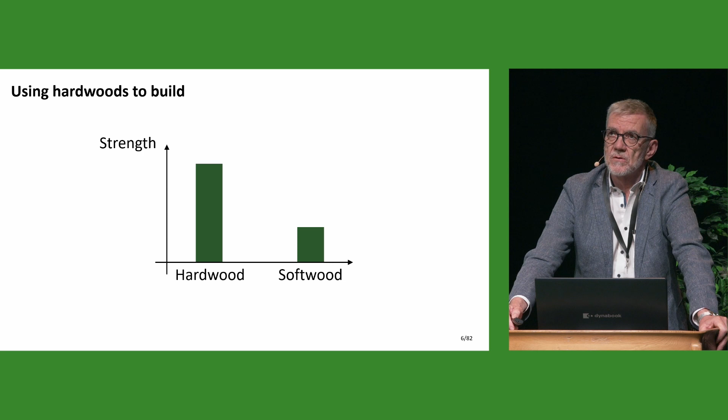Structural building materials which are available already today, made from hardwood, are glulam members, for example, beech glulam or birch glulam. Even CLT is available in hardwood today from birch, and also beech LVL, which is a product that is quite new.

It's not very old yet, maybe 10, 15 years, but it's increasingly used in highly loaded structures. So the material is there. Why don't we use it much more than we do today?

Because for a timber structure, it's not just the material you need, it's also the connections, obviously. You need, for example, to connect structural members. You need to connect a hardwood member to a hardwood member, or a hardwood member to a softwood member, or to a steel or a concrete member.

Of course, there are already rules which allow you to design these or some of the connections, but these rules are, let's say, or lead to quite conservative results with hardwood connections.

If you look at the structure, at the capacity, structural capacity of a member compared to the structural capacity of a connection, this is unbalanced today. The member has a very high strength, the connection has a low strength.

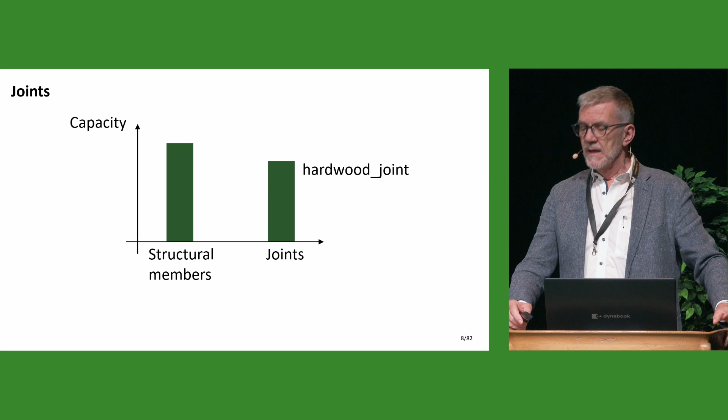And thereby improve the economy and efficiency of timber structures using hardwood.

Mika already has told you the primary purpose of this project: high-performance hardwood structures with connections which are also high-performance connections.

And of course, we need design rules. We need to transfer this knowledge into practice so the engineers are able to use these high capacities.

The industry partners had a bit of a different view, or a complementary view, you could say. They were asking, how can we set the fasteners, for example?

Have you ever tried to, let's say, drive a nail into a beech member? With high probability, the nail will buckle. It's much, much more complicated than to drive a nail into a spruce member, for example.

And can the existing fasteners be used? The nail, for example, is there a need to develop new types of nails which you can use in hardwood structures?

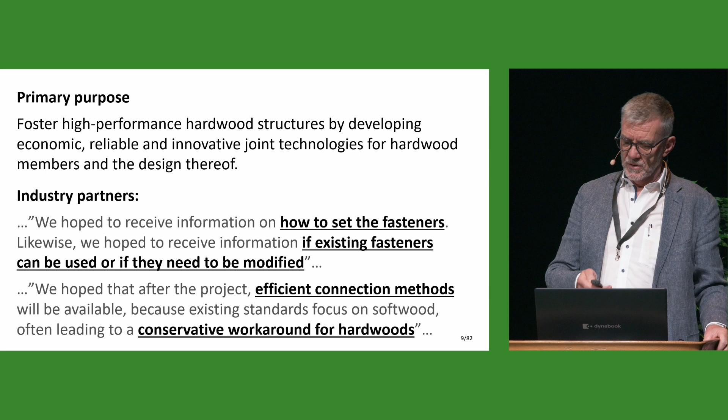They hope for efficient connection methods and hope to get rid of some of the conservatism related to hardwood connections today. Now, how do we go about reaching these goals?

First, we need to understand hardwood connections because they behave differently in some aspects than softwood connections. Then we need to complete existing knowledge where there are knowledge gaps. And then, where possible, we need to optimize or improve the connections so their load carrying capacity and stiffness also increase. These three tasks, understanding, completing, and optimizing, were taken over by different research partners, and implementation was taken over by all.

Understanding and implementing was taken over by Linnaeus University in Växjö, Sweden, and Karlsruhe Institute of Technology. Here we looked at really understanding the difference between hardwood and softwood connections. Are there differences? Which differences are there, and how can we explain the behavior? Then filling knowledge gaps, completing information, especially for axially loaded screws.

That was performed by Technical University of Graz. And optimization was done by LERMAB in Épinal. They especially looked at the rope effect, at increased friction between the members to be connected, in order to increase connection capacity.

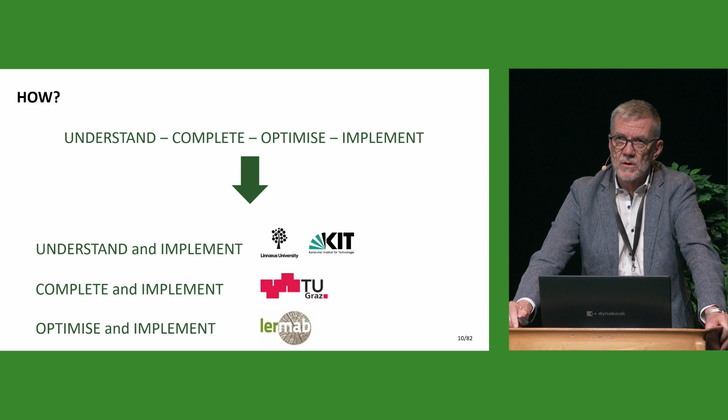Now we'll start with understanding, and I will give the floor to Elisabeth Cook from Karlsruhe Institute of Technology. Elisabeth, the floor is yours.

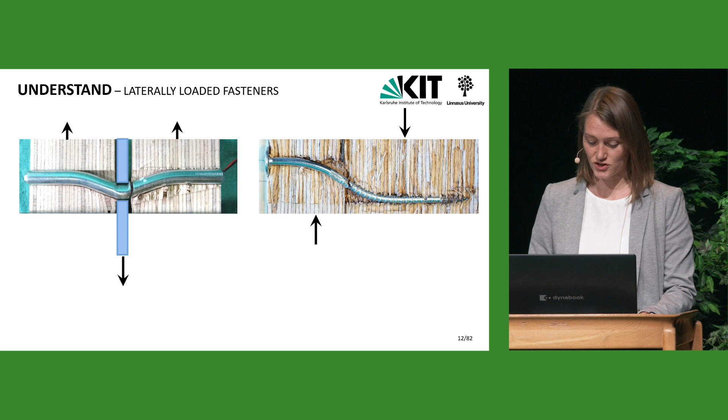First, there is the embedment of the timber. In the area of the inclined fastener, the embedment strength is reached. Second, we can observe the bending of the fastener, which leads to the formation of plastic hinges. This, of course, depends on the timber thickness.

Due to the inclination and the friction between the fastener and the borehole, the so-called rope effect develops and leads to a normal force in the fastener. The rope effect increases the load carrying capacity and is one of the most important load mechanisms for laterally loaded fasteners.

So looking at these two shown connections, we can observe a failure of the fasteners in the shear plane, respectively in the area of the plastic hinges for the timber-to-steel connection. This is a new failure mode that can occur in hardwood connections, and it leads to one of our main aims of research.

The current design codes are mainly based on connections made of softwood. Considering the two shown connections, which are geometrically identical, we can observe differences concerning the deformation of the fasteners. Accordingly, we need a validation for the European yield model for hardwoods. In addition, we wanted to find explanations for the new failure modes, and of course we need to formulate proper execution rules like fastener spacing.

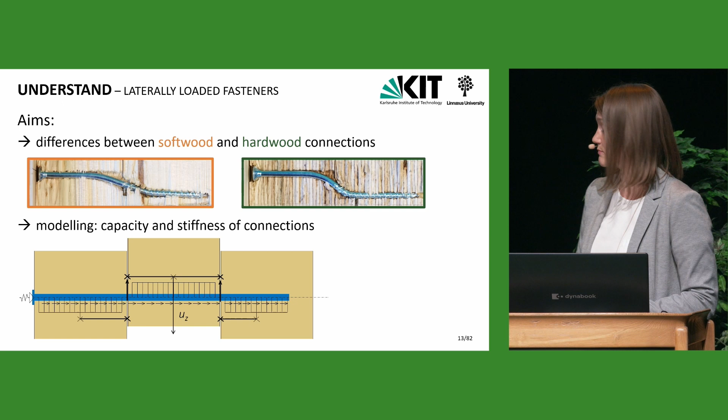During our project duration, we have conducted research on many different dowel-type fasteners, such as screws, dowels, staples, or nails. The timber members in our test setups were made of beech, birch, or oak, and in addition we carried out many tests with spruce specimens to point out the differences between softwood and hardwood.

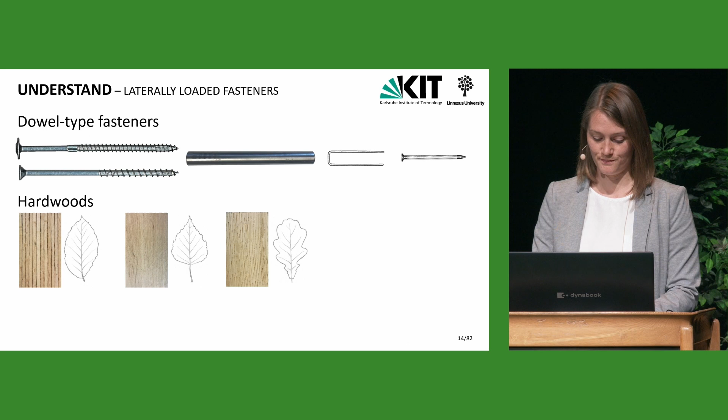To understand the different contributions to the load carrying capacity, we need several input parameters for our connection. A main aspect was the determination of material properties, such as the yield moment and the tensile strength of the fastener. Therefore, 4-point bending tests or tensile tests were carried out.

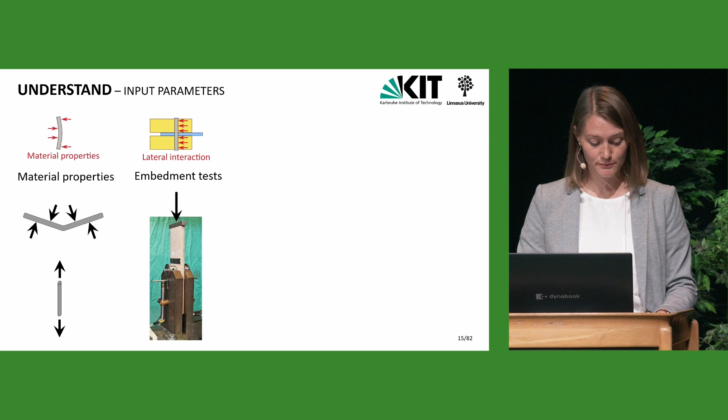To get knowledge about the occurring normal forces in the fastener during lateral loading, strain gauges were applied, glued into the dowel. Thus, the normal force could be measured.

The last contribution to the load carrying capacity is activated by the axial interaction between fastener and borehole. For fasteners with a smooth surface, it is characterized by friction, and for profiled fasteners, such as screws or threaded parts of screws, the withdrawal capacity can be taken into account.

In order to investigate the two contributions from friction and embedment, which occur simultaneously in a connection in reality, biaxial tests were also carried out with the activation of the two load directions. Some of these results will be presented now from my colleague Romain.

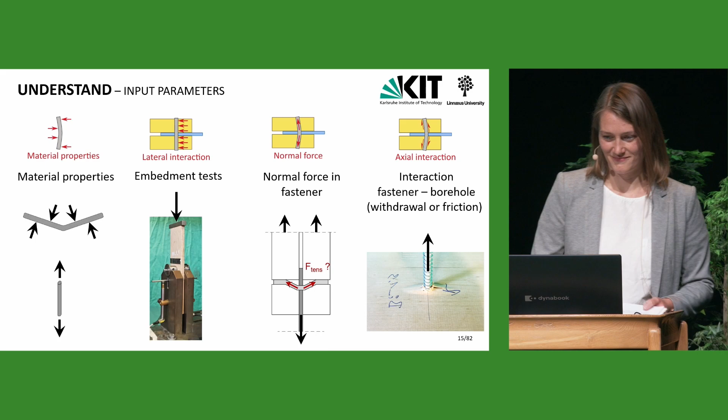The aim of the experimental campaign that I'm going to present now was to investigate the combination between lateral embedment and axial force.

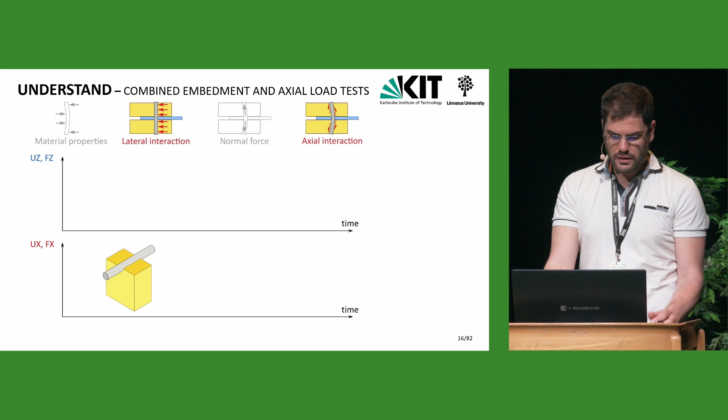The tests were based on, as you can see here on the picture, half-hole specimens. For all series, vertical loading by means of loading and unloading cycles was applied first up to a defined lateral embedment displacement or a defined lateral embedment pressure. Then a horizontal loading was applied, while the lateral embedment displacement was kept constant.

This experimental campaign included two types of steel fasteners, 8mm hardwood screws and a 12mm steel dowel. The mechanical response of combined axial and lateral loading of steel fasteners into various wood species were investigated with beech LVL, oak, birch, and spruce, so that a large range of density from 400 to 800 kilogram per cubic meter was investigated and tested.

I'm going to present now some experimental results for the 12mm steel dowel. Here comes the result: coefficient of friction versus the lateral embedment displacement.

For a lateral embedment displacement of around 14mm, the coefficient of friction observed was around 0.8, and this value was observed for each wood species. Just for some birch specimens, very early cracks were observed, which could decrease the pressure surrounding the dowel and thus the coefficient of friction.

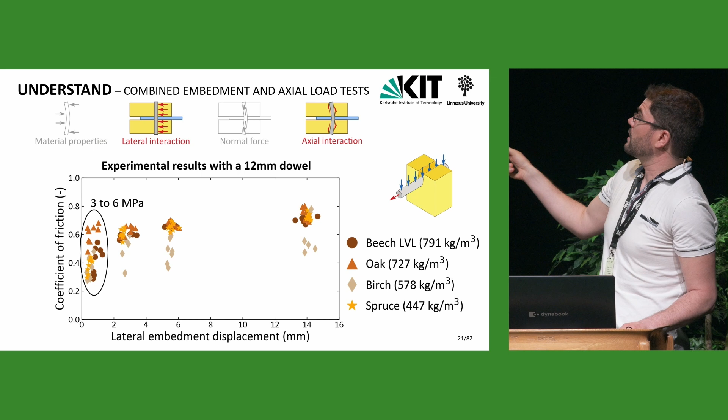In conclusion of this test, it shows a nonlinear relationship between the coefficient of friction and the lateral embedment displacement. It's not uniform, it's a nonlinear relationship. That is an input we can use in the modeling, and we will discuss that later.

I will now give back the floor to my colleagues.

All of the previously presented parameters are crucial for the understanding of the rope effect. The following explanation of the rope effect is based on the work of my colleague Michael Schweigler, and I would like to show it to you.

We have three different effects. The first one is the normal force in the fastener. This contributes to the shear resistance of a connection if a part of the fastener is inclined, which is the case for failure modes with plastic hinges.

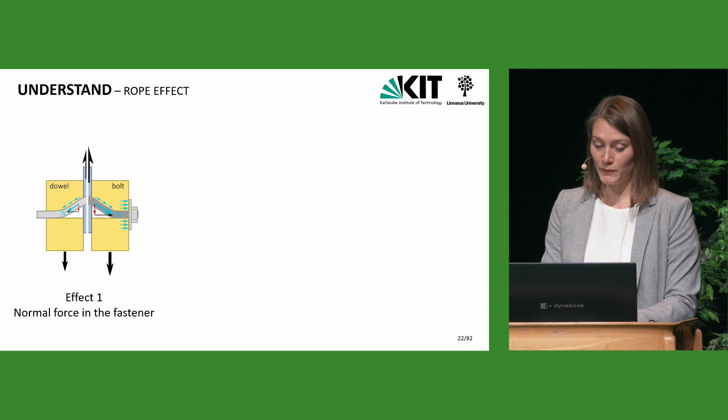The normal force in the fastener might be caused by interaction between the fastener and the borehole, for example friction, or by a mechanical resistance against withdrawal, like the thread of a screw or the washer of a bolt, as shown here in the connection on the right-hand side.

The second effect is the friction in the shear plane. The described normal force also causes a compression component perpendicular to the shear plane. This compressive force leads to a frictional force parallel to the shear plane, which increases the shear resistance of the connection. This is the rope effect as it is considered in the current design code, Eurocode 5, with a friction coefficient of 0.25.

The third effect is the straightening of the fastener, so additional embedment forces and additional connection resistance can be activated, in some cases, with failure modes exhibiting multiple plastic hinges.

In a bolted connection, the washer acts as an anchor, which induces normal force in the bolt. The normal force causes a straightening of the fastener, and this generates additional embedment resistance in the area of the plastic hinge.

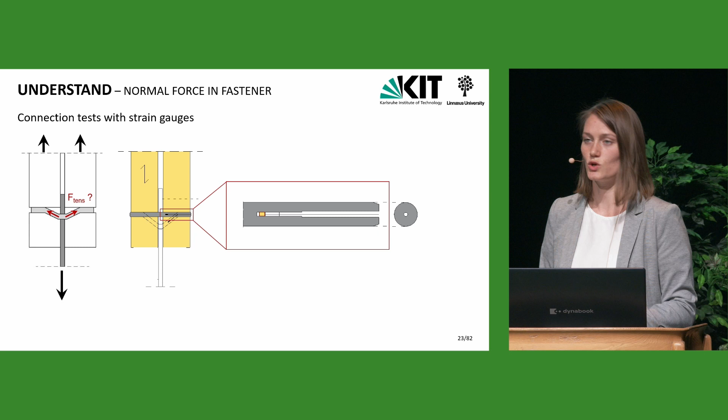We carried out 5 tests, and the strain gauge in the dowel is located in the tension zone, between the 2 plastic hinges that form during loading. You can see the borehole and the position of the strain gauge, and in addition, an opened dowel.

To illustrate our results, I'd like to show some load displacement curves on this slide. In the diagram, the top lines mark the machine load per shear plane, and the lower dashed lines mark the measured normal force in the dowel during the lateral loading.

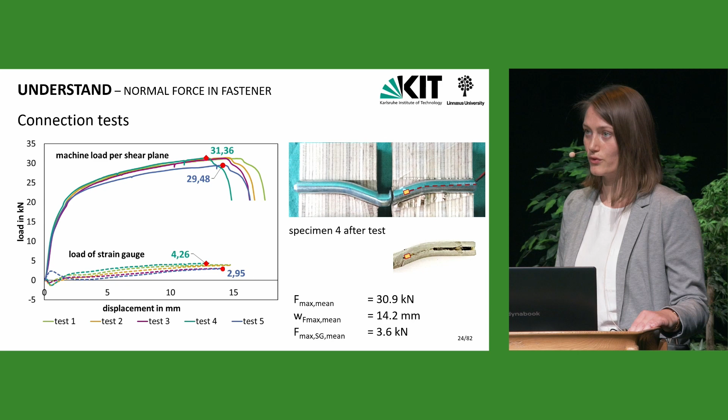As you can see, we reached a maximum load of about 31 kilonewton in the shear plane, and until the point of maximum load, we could record a normal force in the fastener of about 3 to 4.3 kilonewton, which amounts to up to 10% of the load per shear plane.

The connections reached about 14 millimeters of displacement before failure was initiated. All dowels during these tests failed due to fastener failure in the shear plane, as you can see in the picture. With these results, it can be shown that also in doweled connections, an elementary contribution to the load carrying capacity can be activated by the rope effect.

So the modeling of the rope effect is a challenge, and knowledge of the occurring normal forces in dowels is necessary for a validation. Following this, an insight into the modeling will be given by Romain.

Elizabeth explained a bit about the modeling, but I will explain and give more details now. We have different inputs: different material properties from the steel fasteners, the lateral interaction — roughly called the embedment — normal force in the fasteners, and the axial interaction, which can be the friction for the dowel or the withdrawal interaction for screws.

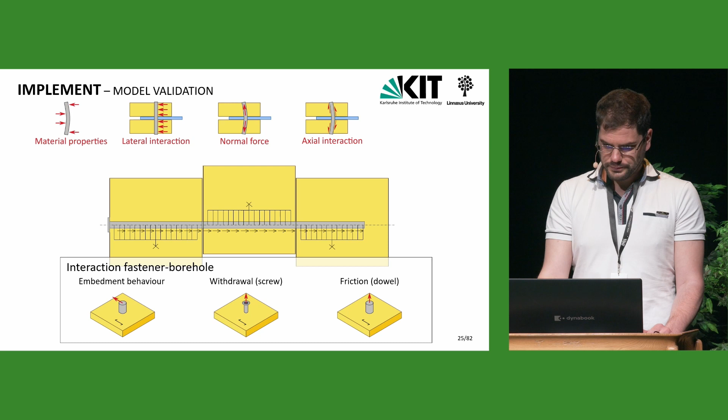The steel fastener is modeled as a simple beam element with an elastoplastic model, and you can obtain these properties thanks to bending tests or tension tests. The last effect of the rope effect is the friction between shear planes, which can also be included in the modeling.

So if we go back now to the experimental result shown by Elizabeth: on the y-axis you have the shear force of the fastener with the full black line, and the gray dashed line is the normal force in the fastener measured by the strain gauge. Now we can make 3 different hypotheses.

One hypothesis: you have no friction along the fastener, so no interaction between the fastener and the bore hole. If we run the simulation, we have quite a good response in the elastic part of the curve, but the plastic capacity measured by the beam on foundation model is much lower than the one measured during the test.

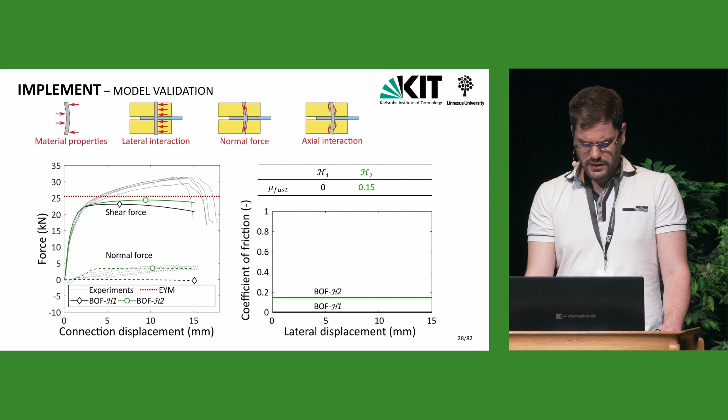So now if we make another hypothesis, with a uniform friction along the fastener and no relation between the coefficient of friction and the lateral displacement, we can see the rope effect starts to be activated. We can increase the plastic capacity of the connection, and we can have some normal force.

Now if we use the third hypothesis, with the experimental result shown before — a nonlinear relationship between the coefficient of friction and the lateral displacement — we find a very nice response between the beam on foundation modeling and the experimental result for the shear force. We still observe a higher normal force inside the fasteners, so we need to investigate that further.

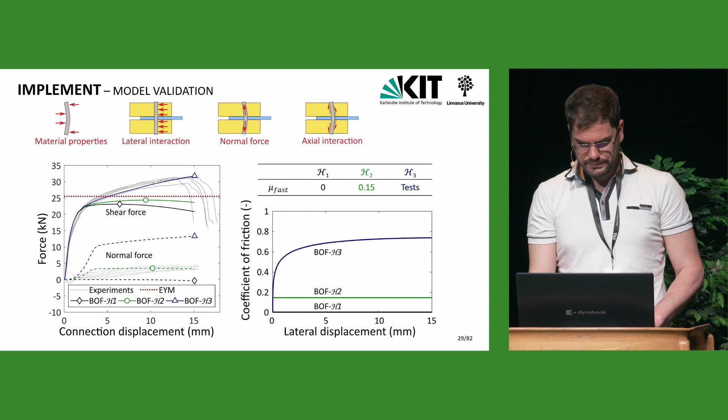Now I would like to present another application of the beam on foundation modeling, which is a proposal of a design equation to estimate connection axial stiffness of connections.

But the first question is, why do we need that? Why do we need a new design equation to estimate joint stiffness? It's clear now timber structures are becoming bigger, taller, and more complex, as we saw this morning, and this is also a problem for connections.

For SLS design, joint stiffness in the connection area is really important for vibration analysis, especially for tall timber buildings. And for ULS design, it's important as well to understand and estimate the good load distribution for each timber member in the connections.

And to estimate the brittle failure mode. For example, if you assume the same identical stiffness in each shear plane, you will not have the same load distribution if you don't have the same stiffness in each shear plane. So we need to go further for that.

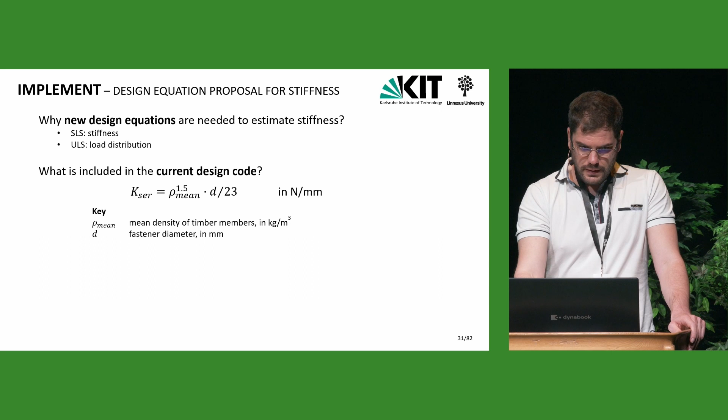The question is also, there is no difference in this equation whether you have a connection with a slotted-in steel plate or a connection with an outer steel plate. It's the same for both types of connections. We can also ask whether there are other parameters which should be included in this equation, for example the thickness of the timber members, the thickness of the steel plate, and so on.

So to answer this question, the first step is to run numerical simulations with the beam on foundation model. For that, different parameters were used for the simulation.

Different densities of the timber member, different numbers of fasteners in a row, different rows of fasteners, different distances between the fasteners, different thicknesses of timber member, different thicknesses of steel plate, and different dowel diameters.

We ran simulations with slotted-in steel plate connections, and simulations with thin and thick steel plates where the steel plates are outer members. In the thin steel plate case, the ends of the dowel are free to rotate. In the connection with thick steel plate, the ends of the fastener cannot rotate.

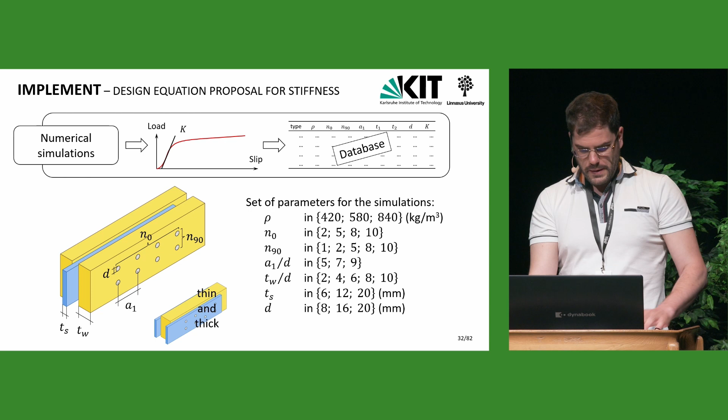The second step is to do a nonlinear regression analysis of the database to find the exponent of each parameter that is important to estimate the stiffness of connections.

With this nonlinear regression analysis, you can create three different equations for these three different connection configurations, and so estimate the stiffness for each. You can also use these equations to estimate the stiffness of multiple shear plane connections.

The last step is to validate these design equation proposals. For that, an experimental database was used, including different wood species, products, dowel diameters, numbers of fasteners, and two or multiple shear plane connections.

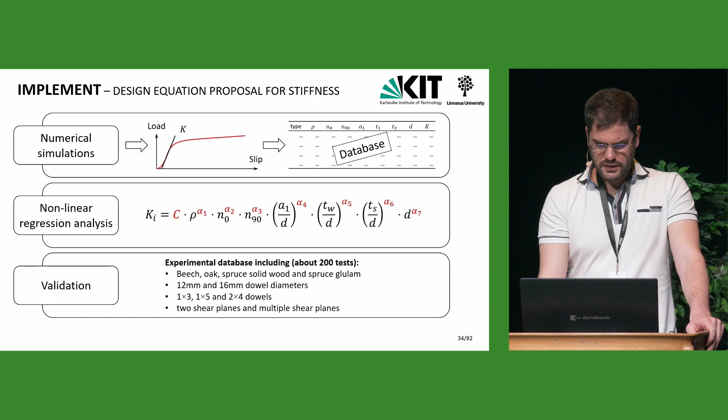That is my conclusion for this part of our work with KIT and Linnaeus University. To summarize: first, we checked if the current design equations in the European code are suitable for hardwood connections. In general, yes, so we can use this equation and improve the code with new failure modes.

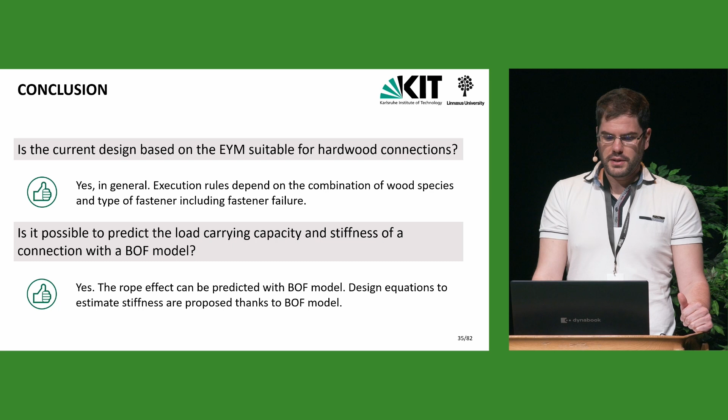We can also use the beam on foundation modeling to predict the load-carrying capacity and the stiffness of connections, and the rope effect can be predicted as well with the model.

So we have now looked at joints with laterally loaded fasteners, and I will let the floor to my Austrian colleagues to present joints with axially loaded screws. Thank you, Romain.

I begin with the characteristics of a screw joint in timber. There is a timber bar element with a grain and main bearing direction. Of course, for a screw we need some outer connection elements. The fastener we concentrate on is the screw, or more precisely, groups of screws. The screws you see here are inserted at an angle to the grain.

Further, there is the loading direction, and the screws have a really high bearing capacity in the axial direction.

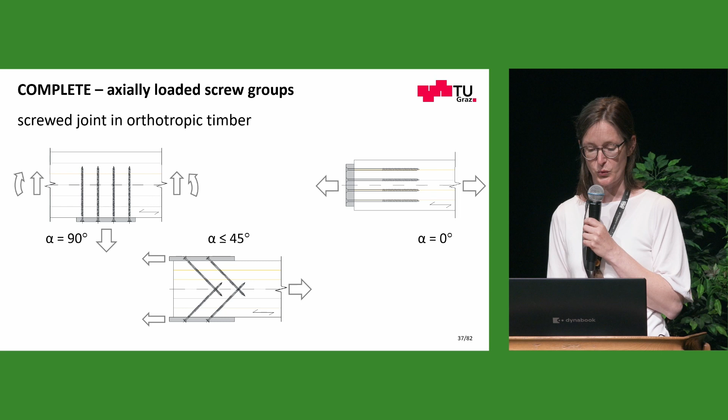There is a variety of joint design, parameter settings, and loading situations, and now the challenge is to define logical, general, and simple design rules for all of them. Such design rules concern geometric minimum conditions and execution rules, for example, some in-between spacings, minimum distances, and so on.

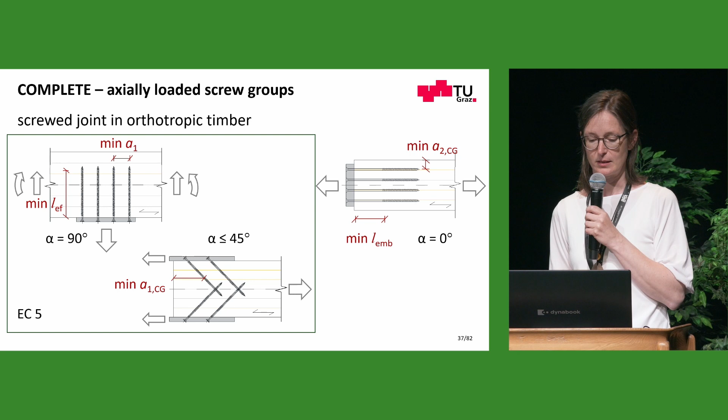The actual valid design standard Eurocode 5 regulates these connection types. Additionally, we have several screw approvals, and partially they also allow end grain joints. The strategy for a safe joint design in Eurocode 5 is, on the one hand, to define minimum geometric and

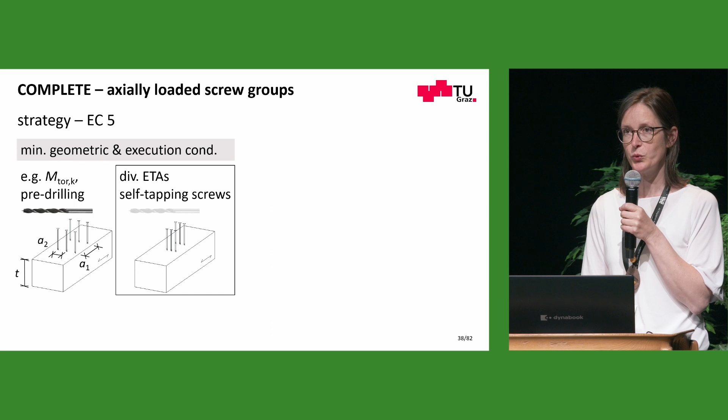execution conditions, for example, like the torsional resistance of the screws, pre-drilling, and then named spacing or distances. Diverse ETAs allow the use of self-tapping screws without the need to pre-drill, and usually they allow a tighter grouped design.

On the other hand, for the knowledge of the joint capacity, we have to consider the failure modes at the insertion and at the loading. We avoid the splitting failure or torsion failure by the insertion with these given conditions. And to get the resistance, we have to verify all possible failure modes.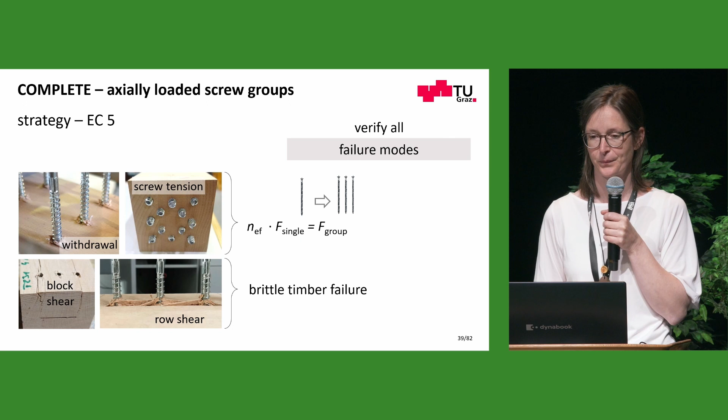This is one problem of these brittle timber failure modes, and additionally, Eurocode 5 doesn't contain any verification model for these brittle timber failure modes. Actually, they are under discussion and always with focus on softwood species.

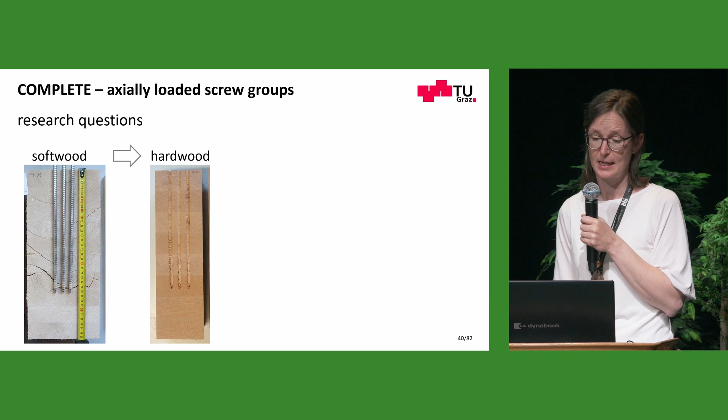All rules for screws focus on softwood species. The question is now, are the given conditions adequate for application in hardwoods?

Next question: there is the higher density of the hardwoods, followed by a higher insertion resistance and bearing capacity. Can we use the same arrangements and the same screws? Are there limits in the screw capacity?

So meanwhile, we have screws with partially optimized properties for use in hardwoods, even self-tapping screws. So the safe insertion can be easily controlled by doing so, and producers and our experience show that the insertion works.

And the third question is, due to the unsolved handling with these brittle timber failure modes, we suggest to prevent them by defining additional conditions. You see, we need to review the given regulations on hardwood and investigate their impact on the failure behavior.

We did a lot of experimental investigations within this Hardwood joint project. And from the manifold application possibilities, we concentrate on 3 different joint types.

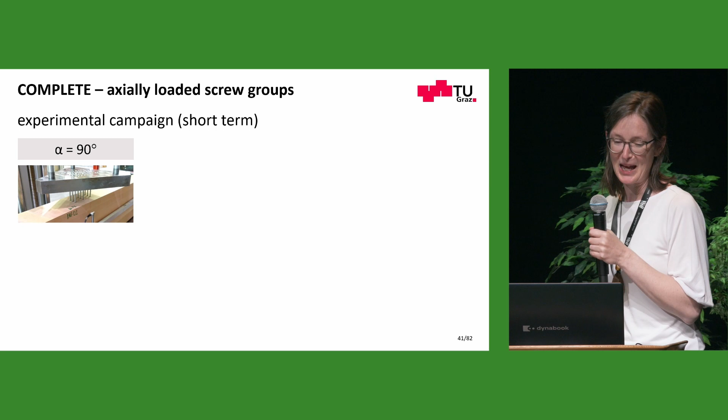A connection with loading perpendicular to grain. A tension lap joint with an inclined row of screws, and an end grain joint.

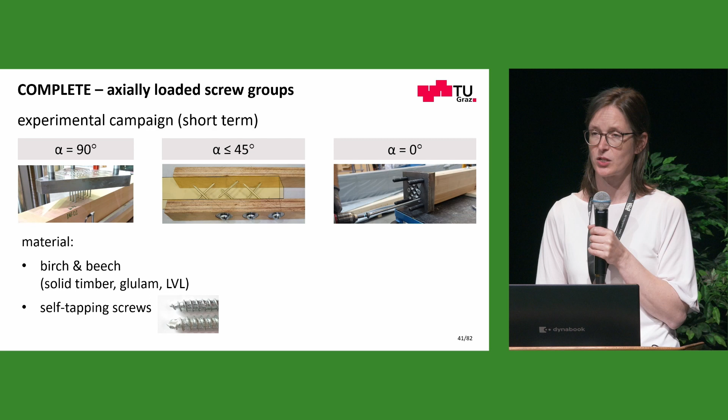As material, we concentrate on hardwood species, birch and beech, and we tested them in form of solid timber, glulam and LVL. We used self-tapping screws as worst case scenario for possible initial crack building.

We varied the parameter settings, like the spacing in between the screws, the dimension, the insertion depth, and so on, the group size. And finally, we related them to the failure modes.

And presenting now the main results, I come back to the questions. Are our screws and the minimum geometric and execution conditions adequate for our axially loaded groups of screws?

A good note, a good thing. Yes, generally they are. And the second important question: can we suggest minimum geometric and execution conditions to avoid these brittle timber failure modes?

Even here the answer is yes, but we have to differ between the joint types with a separate view on end grain joints and more or less all the others with insertion from the lateral timber side.

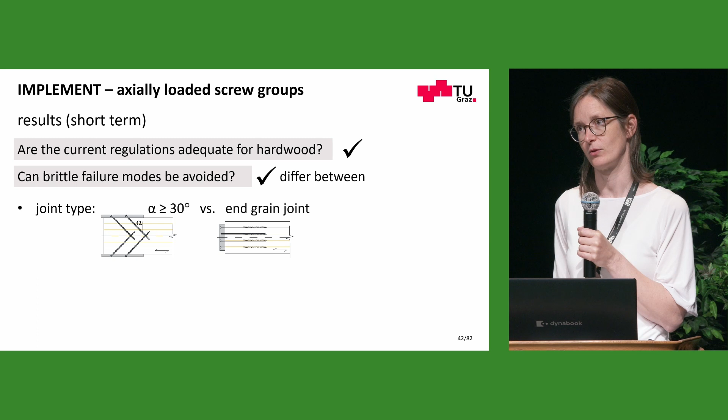We have to differ between the timber products LVL and glulam. And we have to consider there are different regulations according to Eurocode 5 and diverse ETAs.

And additionally, we define some additional parameter settings for the end grain joints. And in addition, there is some more specifying for which, if you differ between withdrawal and screw tension failure.

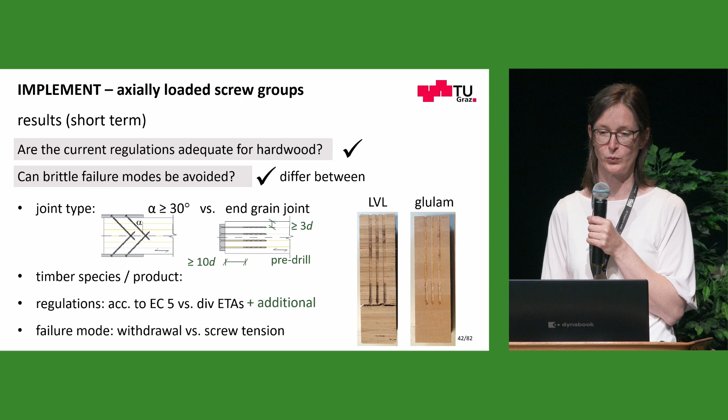So that's in the end easy, that I can say yes, that works. Screws in hardwood work, and so we learned

what's the short-term behavior of these groups of screws, and we know there are some long-term effects in the timber regarding the load intensity and the climate conditions. So what about these long-term effects, named duration of load effects? This tells us now my colleague Michael Stettner.

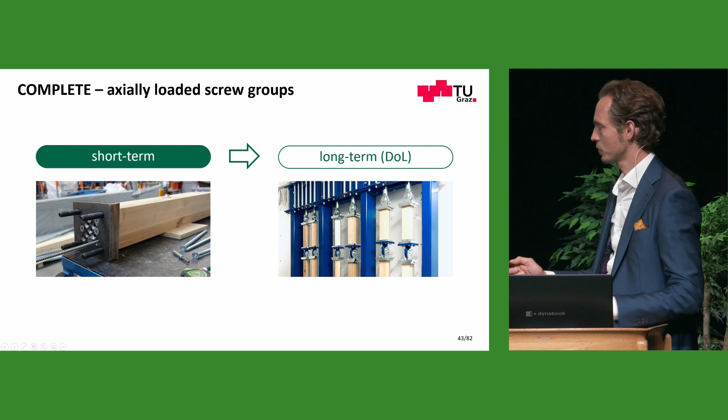My name is Michael Stettner, and I would like to make a switch now from the short-term testing to the long-term testing. As Ursula said, it's also known as the duration of load effect of self-tapping timber screws.

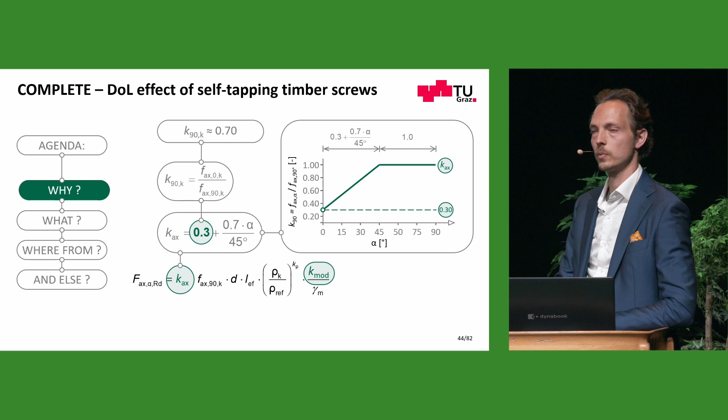As I mentioned, we have the K-mod factor, and the K-mod factor considers the product, the joint, the service class, and the load duration class.

I would like now to show you the test setups. I have two test setups. On the left side you can see the test setup for the single screw, and on the right side you can see the test setup for the groups of screws with the group size of 4 and 9. On your very left hand side you can see the different screw types which I'm using.

Furthermore, I use spruce and beech and also birch, and different screw types. I also have a variation in the angle axis to the grain with 0, 15, 30 and 45 degrees.

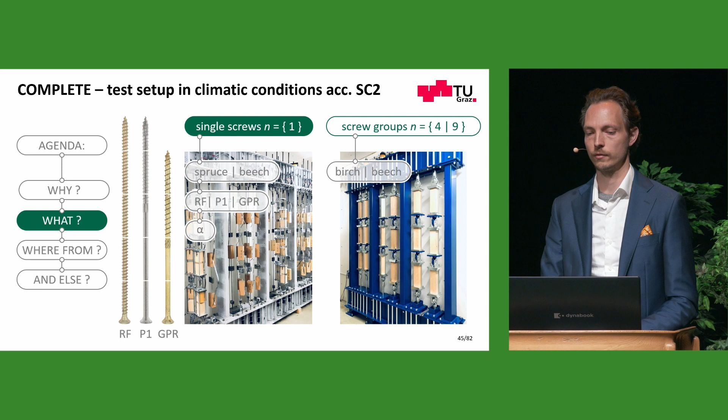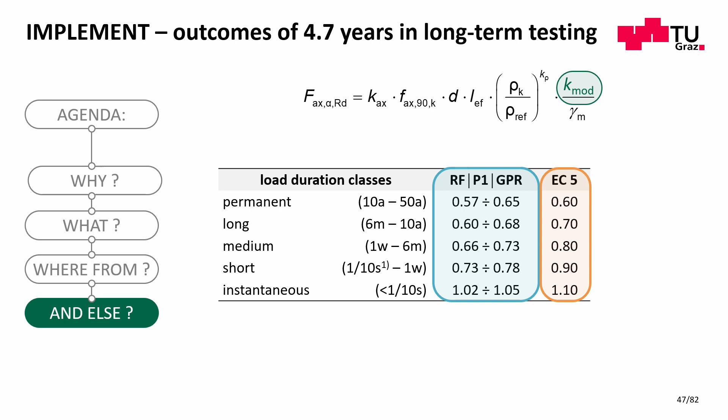In the next step I take the K-mod factors from the chart on the conservative side, and I have some values for you. If we now have a look at the next table, you can see these values for the load duration classes for the different screw types. I have also added the K-mod values from the current standard, the Eurocode 5, and we can see that there is not that big a difference due to the K-mod factors, which makes me quite happy.

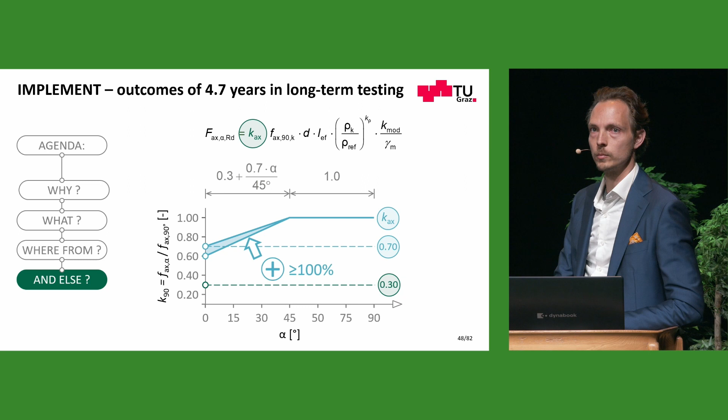Referring to the bilinear diagram again, as I said, we can see here the 0.3. Now I can make a suggestion. I have to say the angles with 0, 15, 30 and 45 degrees, and I would like to mention that I started investigations with 90 degrees just last week. Now I would like to suggest that we can increase the factor K90 from 0.3 to approximately 0.6 or 0.7, so we increase the performance by more than 100%, and this is very nice.

So at the end, I would like to repeat our question: if the geometric minimum and execution conditions are also applicable in the case of DOL, and I have to say yes, they are, because I observed in each single long-term test a withdrawal failure.

So this is very good, and I can provide K-mod factors for the single screw already. The K-mod factors for the groups of screws are now being computed, and I'm looking forward in the near future to being able to say something about the K-mod factors for the group of screws.

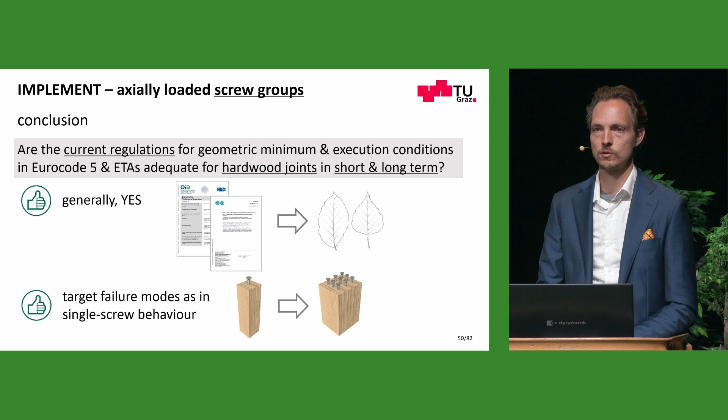So let me now make an overall conclusion according to the presentation also of Ursula. I would like to ask again: are the geometric minimum and execution conditions adequate for hardwood joints in short and long-term testing? Yes, they are. And it's good that we have the target failure modes also in the single screw behavior, so we can transfer our results to the group of screws.

So we were now talking about the dowel type fasteners, and now I would like to ask if there is some other opportunity to increase the stiffness and the capacity. I would like to invite Annabelle, which is a French colleague of mine. Annabelle, please.

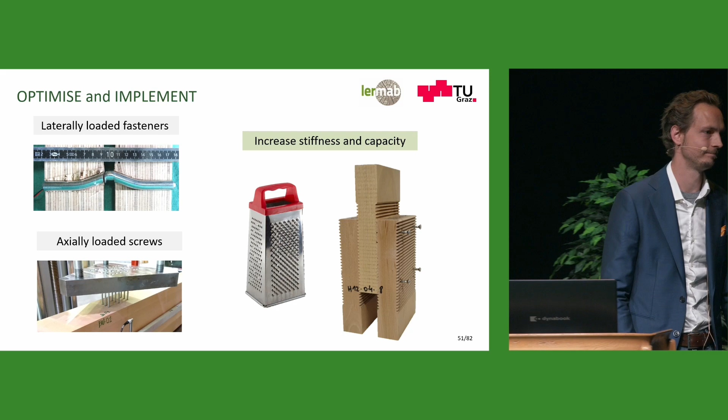Thank you, Michael. My presentation will focus on the development of an innovative joint, the shallow grooved joint. First, let me explain what a shallow grooved joint is. It's the assembly of grooved planks - you have a picture here, and some samples of grooved joint as well.

The grooved planks are held together by screws, and at the wood elements' intersection, the shallow grooves fit together and are in contact. Their function is to transmit shear forces, and since hardwoods have higher properties than softwoods, using them increases the stiffness and capacity of these joints. So the main idea here was to increase the friction between the wood elements with shallow grooves.

But the development of grooved joints doesn't only come from this idea. Indeed, the first idea was to create expanded structures in 3D by piling planks. These structures consist of planks with the same section, piled and connected with shallow grooved joints.

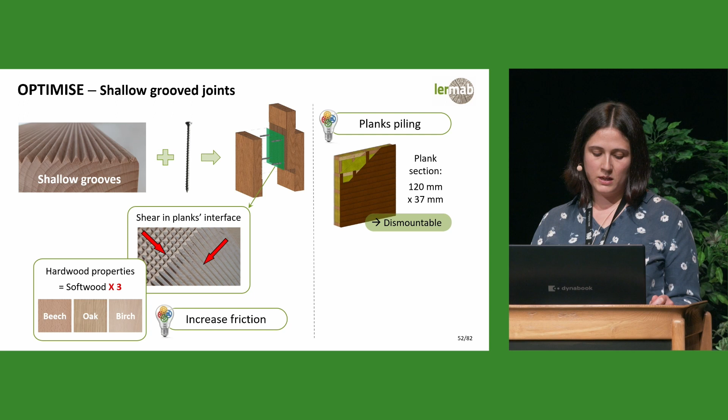This structure consists of crossed planks, and if we add insulation boards, it becomes a wall that can be used for a building. As we use screws, the structure is dismountable, so at the end, the planks can be reused for another purpose. Shallow groove joints have also been developed with the idea of a robot-based production of the structure's elements.

So I presented you the main ideas that led to the creation of shallow groove joints. Next, the scientific and technical obstacles that appear in order to build with this joint. The first obstacle is machining - can it be done for all hardwoods?

The second question is about the screws: how many do we need, and what are the design rules for them? For example, the minimum edge distance.

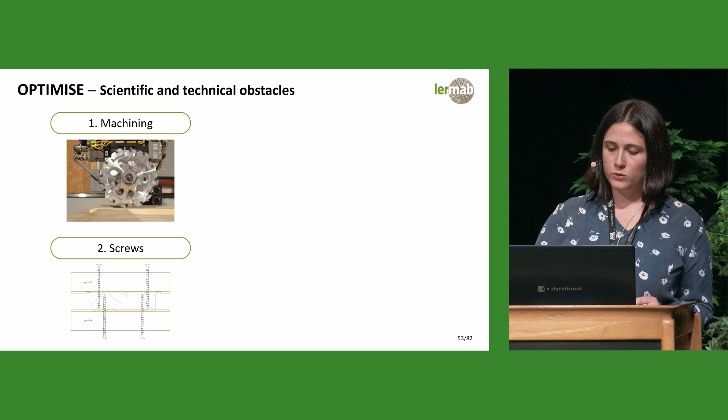The third question is about load carrying capacity and stiffness. Shallow groove joints can have different geometries - the planks can be crossed at a variable angle. So we need to establish design rules for load carrying capacity and stiffness as a function of the angle between the planks.

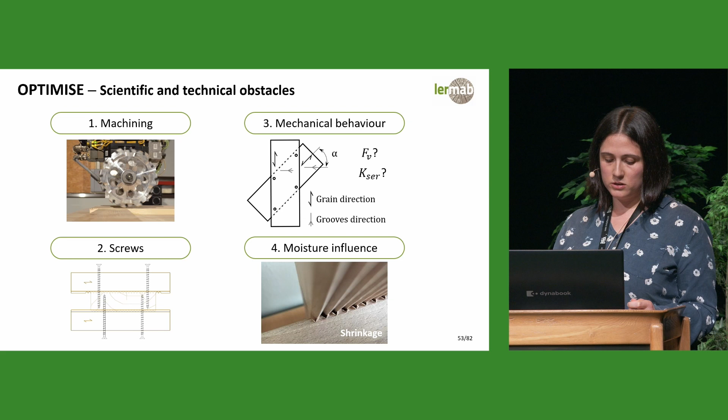The last obstacle is the moisture influence. It's really important with timber joints. The stiffness and load carrying capacity depend here on the contact between the planks, between the grooves. For example, in this picture you can see the effect of shrinkage - there is a gap between the planks. So the question here is, what is the influence of the moisture content variation on the mechanical behavior of the joint?

Let's start with the machining. The grooves are machined at Lermab by a gantry robot with a specific tool that you can see here. As said before, the planks can be crossed at a variable angle, so the grooves have to be done in different directions from the grain direction. In the longitudinal direction, all species can be machined. It's the same with an angle of 45 degrees between the groove direction and the grain direction.

For grooves in the transversal direction, perpendicular to the grain direction, machining is possible for beech, birch, and oak. But we still need to find optimal parameters for beech LVL.

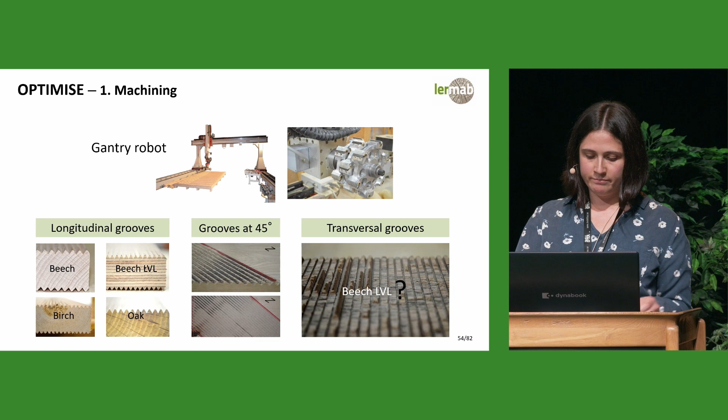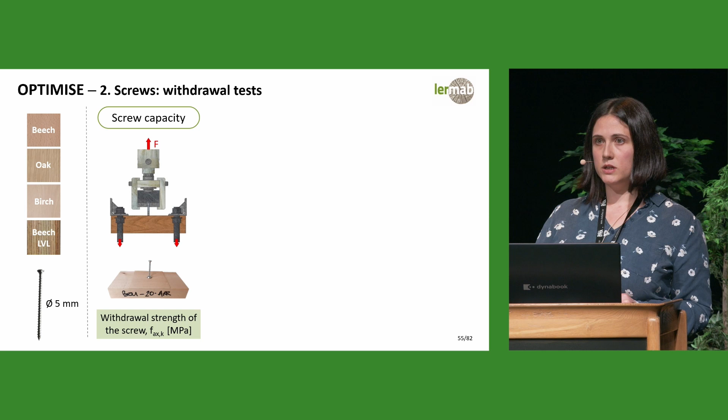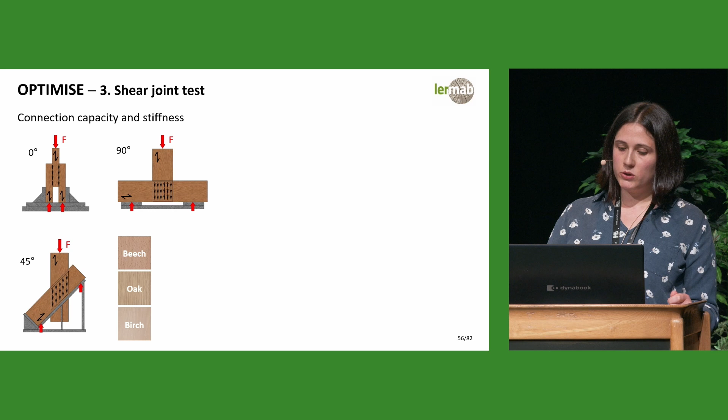To investigate the mechanical behavior of the joints, shear tests were done with different angles between the planks. For the configuration at 0 degrees, the wood elements have the same grain direction. For the 90 degrees configuration, planks are crossed perpendicularly, and there is also a configuration with an angle of 45 degrees between the planks. Shear tests were done for beech, oak, and birch, with 1, 4, or 6 screws per shear plane.

Now let's look at a test at 0 degree with beech, with 6 screws per shear plane. You can see 3 wood elements with the same grain direction held by 12 screws, 6 on the left and 6 on the right. But the position of the screws is not symmetrical, so that minimal distance between the screws and minimal edge distance are respected.

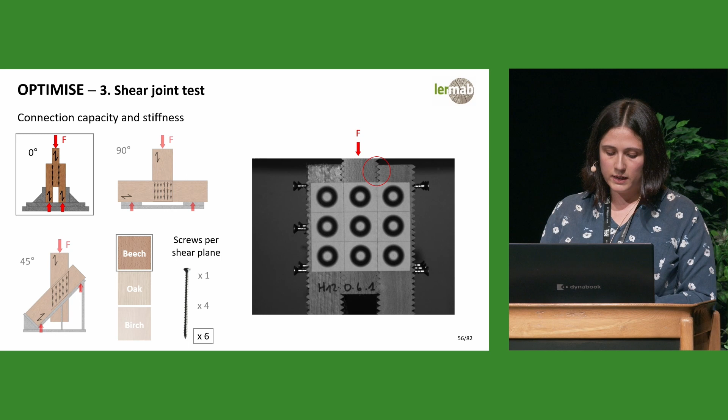You can see that the middle element wood is loaded. And at the top, you can see the failure of the grooves. So let's have a closer look at the results.

I'm going to present you test results for 0 degree shear test for beech. The graph shows the load as a function of displacement during testing. The black line represents the load for a joint with 4 screws per shear plane, and it's a joint without grooves. It's just to have the behavior of the screws.

Now, the blue line is for the same joint, but with grooves. So when we compare the curves, we can say that the load carrying capacity of shallow groove joints depends on the shear strength of the grooves.

In this configuration at 0 degree, these are transversal grooves. Therefore, the joint capacity depends on the longitudinal shear strength of the wood. The shear can only be transmitted if the planks are held together. So we need screws. But the groove's friction limits the number of screws.

For example, with 6 screws per shear plane, there is no huge difference than with 4 screws. And to characterize the friction between the grooves, tests with 1 screw were done.

Now we can have a look at 90 degrees shear tests. Pay attention that the displacement scale is different, but the load scale is the same. And you can see that it's the same behavior as for 0 degree tests. But the load carrying capacity is lower.

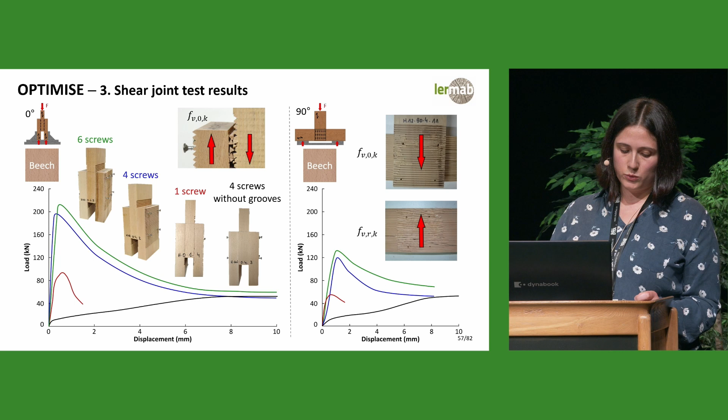Like for 0 degree tests, there are transversal grooves. But there are also longitudinal grooves. Therefore, it's the rolling shear strength that governs the behavior of the joint. The rolling shear strength is lower than the longitudinal shear strength.

Until now, all shear tests were done at a 12% moisture content. But what will happen if the wood loses or gains moisture? To quantify the influence of moisture content on groove joint stiffness and load carrying capacity, shear tests were done with moisture content variations for 2 configurations and 2 hardwood species.

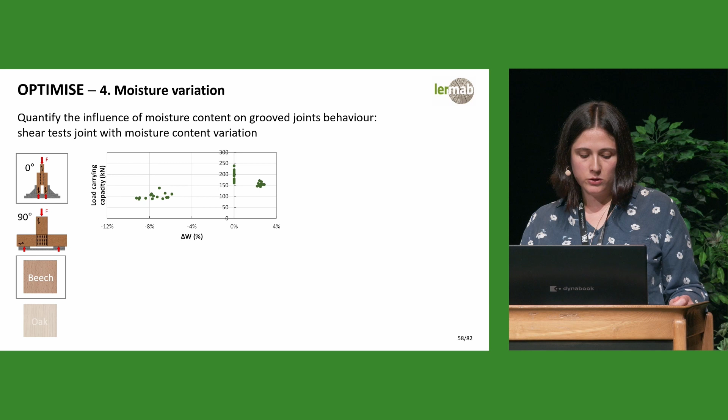Let me present you some results for 0 degree shear tests for beech. This graph shows the load carrying capacity of groove joints with 4 screws as a function of the moisture content variations. That means that at 0%, our tests were done at 12% of moisture content. Joints were assembled at 12% and tested at 12%.

On the left, there are tests with joints that have lost moisture content after the assembly. So there has been shrinkage between the wood elements. At the opposite, on the right, there are tests with joints that have gained moisture content. So there has been swelling.

From these tests, we can characterize the influence of moisture content on the load carrying capacity. And it's possible to do the same for the stiffness. But for both cases, we can't conclude when joints gain moisture content. But we can establish a law where there is moisture content loss. For example, at minus 8%, there is a loss of 50% of the load carrying capacity.

And let's take a closer look at the sample. Before testing, as expected, there is a gap between the grooves due to the shrinkage. And after testing, you can see the failure of the grooves, as before.

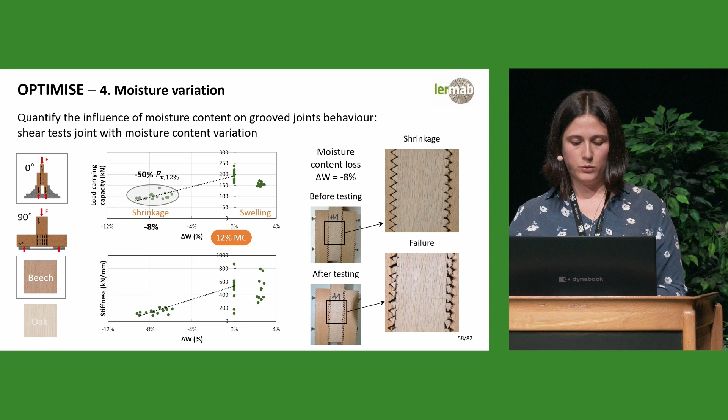All tests I presented, shear tests at 12%, shear tests with moisture content variations, and pull-out tests, were used to define design rules that I am going to explain briefly.

The joint consists of an element with transversal grooves. The grooves are perpendicular to the grain direction. To this element, a second element is screwed. The angle between the grain direction and the grooves direction is variable for the second element.

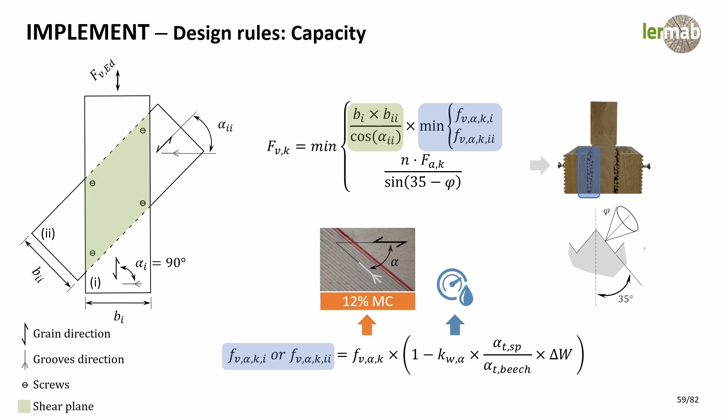Let's go back to the groove's shear capacity. These depend on the groove's shear strength at different angles from the shear test at 12% of moisture content. And it's corrected by a factor to take into account the moisture content variation influence. Now for the stiffness, with the same joint definition.

Longitudinal and transversal groove stiffness are given by shear tests at 12%, and those with moisture content variations, like for the load carrying capacity.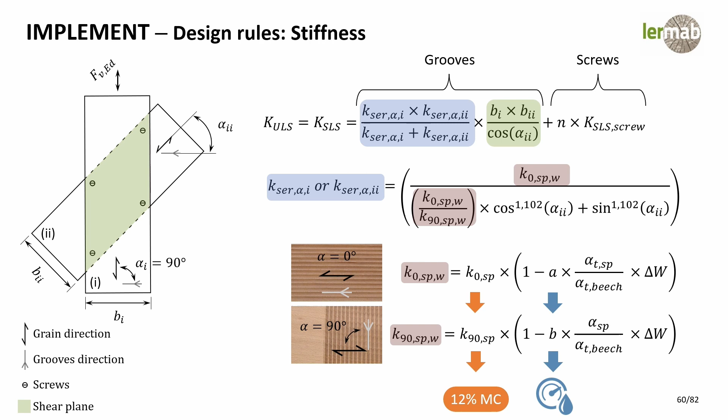You just followed the presentation of the research results of hardwood joints: understanding, completing, optimizing, and implementing new insights into hardwood timber connections.

Just summing up shortly: are the present design rules suitable for hardwood connections? In principle, yes. However, we need to look at combinations of wood species. We cannot have the same rules for all species. And we need to include new failure modes, especially breaking of the fasteners, which was never observed in softwood connections.

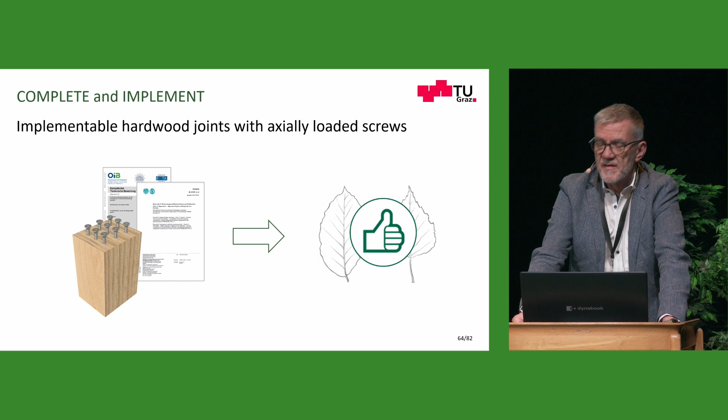The part completing: yes, we can now implement hardwood joints with axially loaded screws, and obviously the long-term effect is much less severe than anticipated.

We look at the optimization and the implementation. Shallow grooves can considerably increase friction in shear planes, and that leads to new chances of having high-strength connections in hardwood joints.

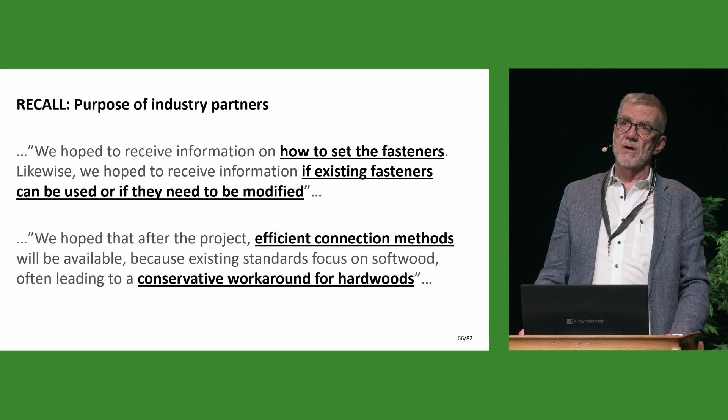So the industry partners, this is a repetition of the beginning: they hoped to learn how to set fasteners and if traditional connectors can still be applied. And they wanted, as a result, efficient connection methods and to get rid of the conservatism around the design of hardwood connections. Now, they thought in the beginning they were just looking at the fasteners and could solve problems just by solving problems with these fasteners.

But we need to have a closer look at the surrounding conditions, for example climatic conditions during storage, transport, or erection. And also we need to have a look at very good production and processing conditions. This has to be considered as well.

We also need, of course, the transfer of the research findings to practice in order for the engineers to be able to use them. And therefore, we need an application brochure where the results are gathered and given to practicing engineers. And that leads me again back to Annabelle, to the panel discussion.

Thank you, Professor. Thank you.

I will now begin the last part of our presentation, the panel discussion, and it will begin with a quiz.

If we put everybody in a basket, a big basket, it will weigh 1.6 tons, and that represents 16 kilonewtons.

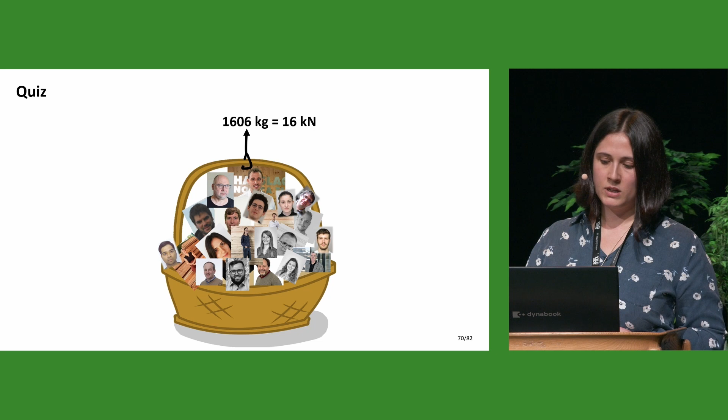So now, have a look at this groove joint. I have one here, for example, so you can see the size of the joint. This joint is in beech, with 4 screws per shear plane, so it's 8 screws in total.

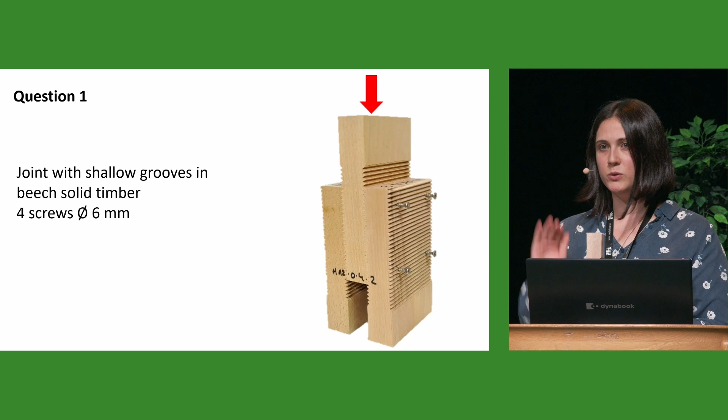Now I will ask the question, but it's old school quiz, so you will have to lift your arm, not an application, sorry. So the question is: how many baskets with team members can be lifted? You have 3 options: 0.1, so 2 people, it's not very hot; 3.4; and 11.8.

So who is for the first option, 0.1? You don't believe in this joint. Who is for 3.4? Some people, okay. And for the last choice? Yeah, you're good, you follow the presentation. Yeah, it's a good answer.

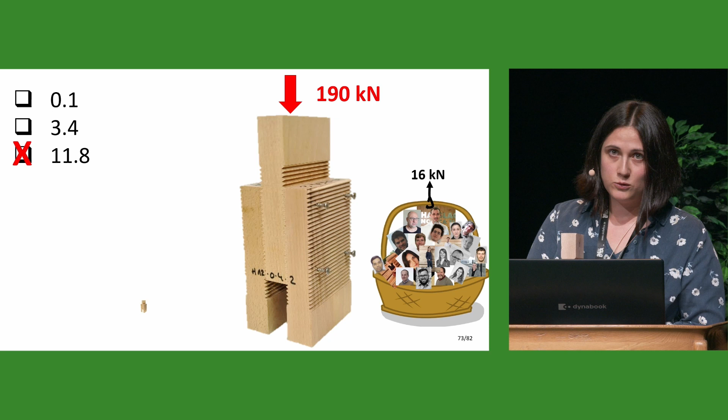And if we put this little joint here, so you can see here, I don't know if it's to scale, the scale is different, because this little joint can support a lorry of 19 tons. That's what it means. So Ursula will ask the next question.

I even have such a question for you. You see here an end grain joint with a glulam of beech, and there were inserted such screws, 19 of them.

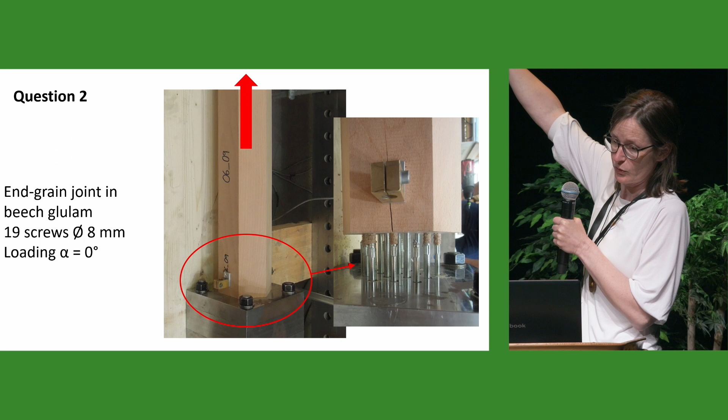As you see, the loading is parallel to grain. You see the arrow for the force direction. The question is now, how many lorries can be lifted with this connection? You have the possibilities: 0.6 times,

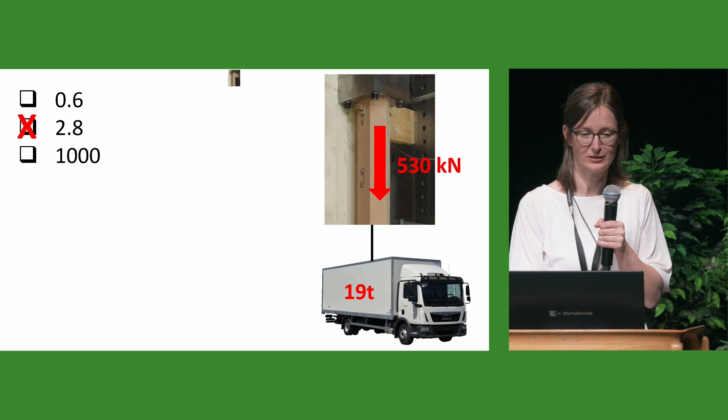2.8 times, or 1,000 of them. So who is for the first solution, 0.6? Okay, I see some hands. Who decided for the second solution? Okay, more. And who thinks there are 1,000? It's the right answer. Okay. It's the second solution, right? Done. You can lift, which is the relation, the right relation. You can lift nearly 3 lorries with this connection type.

Okay, we prepared another one.

A question to the laterally loaded connections. It will be a more challenging one, but I believe in the audience, so you can see a joint made of beech LVL. We had 2 times 4 screws, so groups of screws. The loading was in grain direction, but the screws were inserted perpendicular to the grain. So here you can see the connection in detail. So we have 8 screws on both sides.

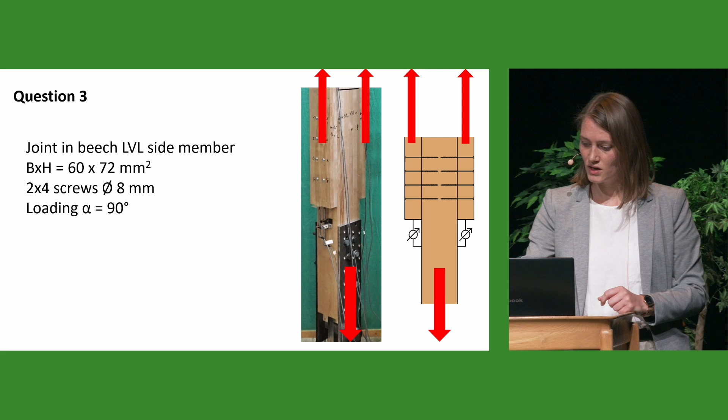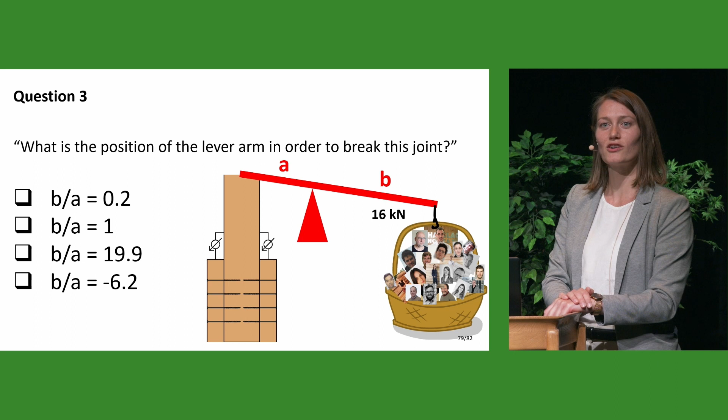So the question is now, what is the position of the lever arm in order to break this joint? So all the engineers, please go ahead. We have the basket on the right-hand side with 16 kilonewton. I will give you some help. So we are looking for the ratio of B to A, and we have 4 options: 0.2, 1, 19.9, or minus 6.2. So please go ahead.

Who is for choice number 1? Maybe someone needs time to calculate. Okay, we go over option number 2. B to A is 1. Then number 3, 19.9. Okay, I can see a few hands. And who is for the last option? Oh, somebody. Okay, interesting choice. So, of course, it is option number 3, and this joint could carry 320 kilonewton.

Okay, I hand over to the last quiz question. Okay. Last question for our old school quiz. So I will try to be more serious than my colleagues.

So how much time do you think we need to run a simulation of this steel-to-timber connection with 2 rows of 6 fasteners? And which computer do you have? This computer.

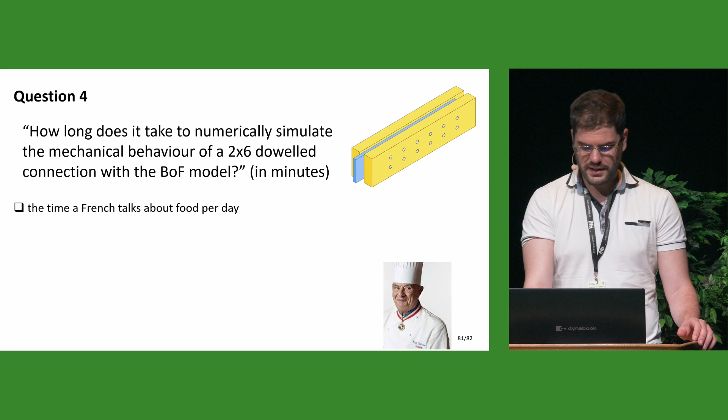So, first answer. Yes, for this one I need my French accent. The time for a French talks about food per day, or drinks, yeah. The time for a German to drink a mass of beer. The number of Wiener Schnitzel consumed in Austria per inhabitant per year. Or the time it takes to understand IKEA instructions to assemble a furniture, but a very simple one.

So I will just give you the answer now. So for the first answer, 1,440 minutes, so 24 hours per day. So who thinks that is the good answer?

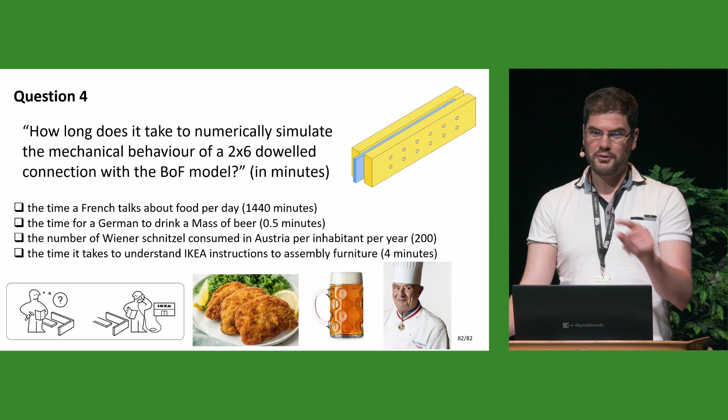Yeah, okay. So the time for a German to drink a mass was 0.5 minutes. Yeah, I saw some German people too, so they want to define their own cliches. So, yeah, the number of Wiener Schnitzel, so it's 200 per year, inhabitant per year. That is the official number. Yeah, so 200 minutes. And the time it takes to understand IKEA instructions, so 4 minutes.

Yeah, so we need 4 minutes to run this kind of simulation with the BoF model. So yeah, that's concluding our presentation. So now we can have some real questions together and start our panel discussion.